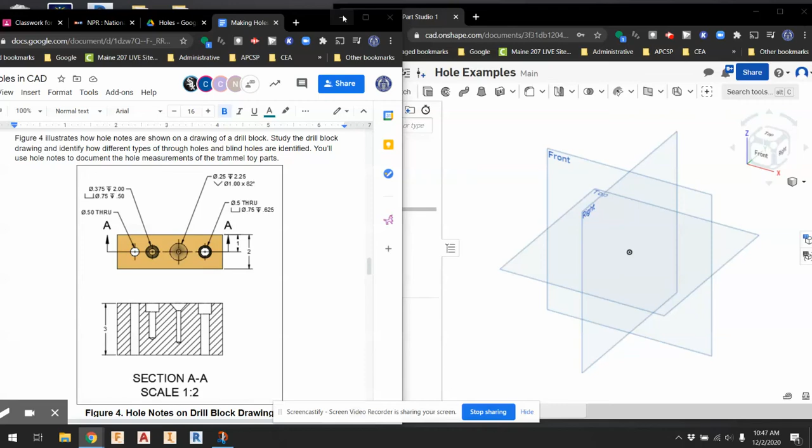All right, here is the support video to create this hole block. And here is the answer key that we're going to be recreating.

First and foremost, we're going to make the overall rectangular block. It's 3 inches tall, 7 inches wide, and 2 inches thick.

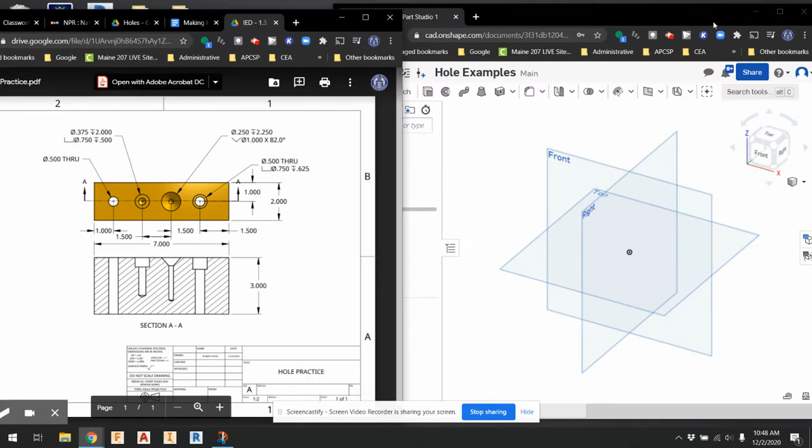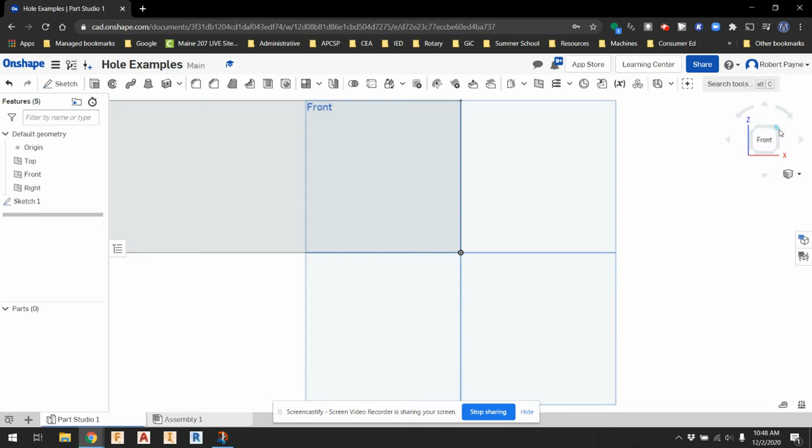All right, so I've already got an Onshape blank document started. So I'm going to do a sketch, work on the front. Use the rectangle command, so go from here to here, and remember, it's 7 inches wide and 3 inches tall. Go back to ISO view and extrude it so it is 2 inches thick.

All right, now we need to place the holes. When you place a hole or start a hole, you first need to put points at the center marks of those holes. If you look here, the holes, starting from the right edge and going over, it's 1.5 inches over each time to find the center mark of each hole.

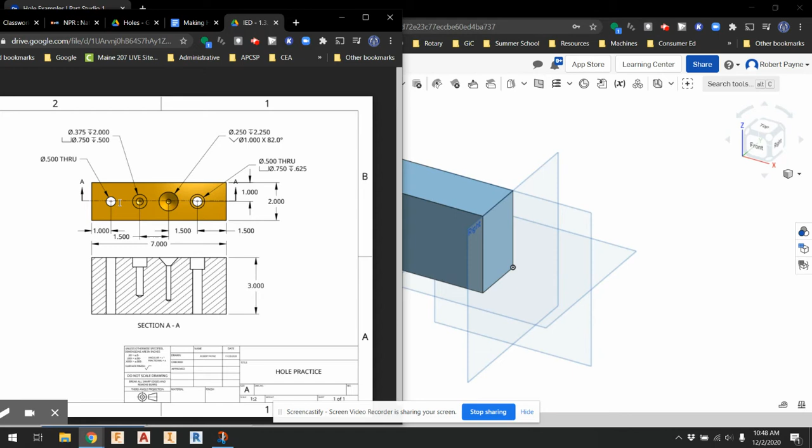All right, so I'm gonna do that on the top. I'm gonna do a sketch on the top, go to the top now. Here is the hole command, and I'm gonna just place them kind of roughly where I think they're gonna go. Nothing dimensioned yet. Now dimension them.

So again, from this edge to here should be 1.5 inches. From here to here should also be 1.5. And here to here is 1.5. And here to here is...

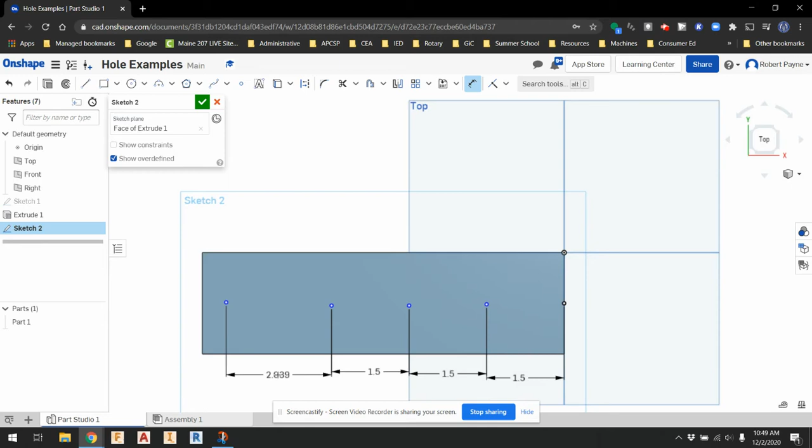1.5. The other thing is that they are in the center of the block, so they're 1 inch down from the block. So let's go ahead and do that. From here to here should be exactly 1. Repeat that a couple times.

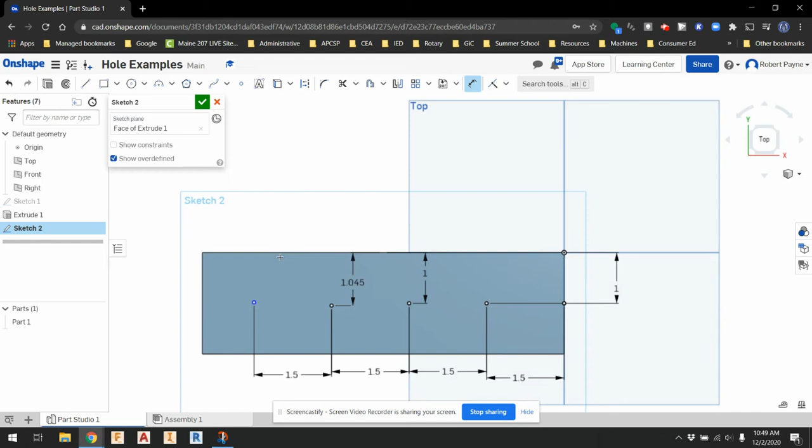All right, and last one. So the center marks are now in the correct locations. Finish the sketch. Now let's start placing some holes.

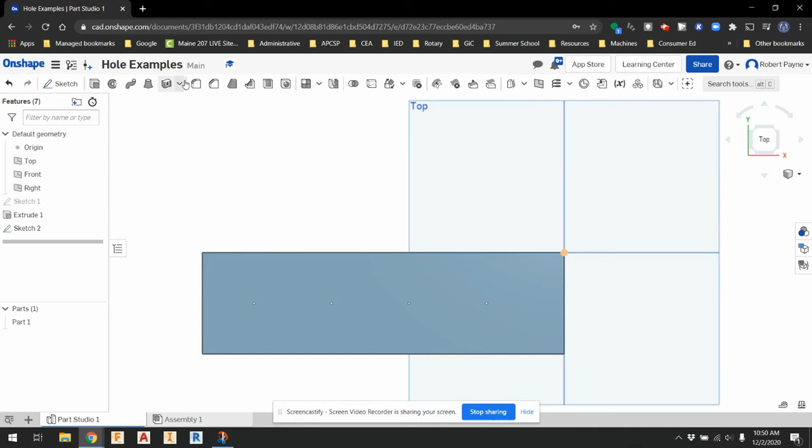So I'll do the easiest one first. This one I'll do first. And if we look here, let's see, am I able to zoom in a little? Okay, either way. All right, so this one, the diameter is 0.5 inches and is a through hole. So it's a simple half inch through hole. Okay, so use the hole function, which is right here.

Make sure it is for simple and it is a through hole. The diameter is 0.5. And just click on the center mark and that's it.

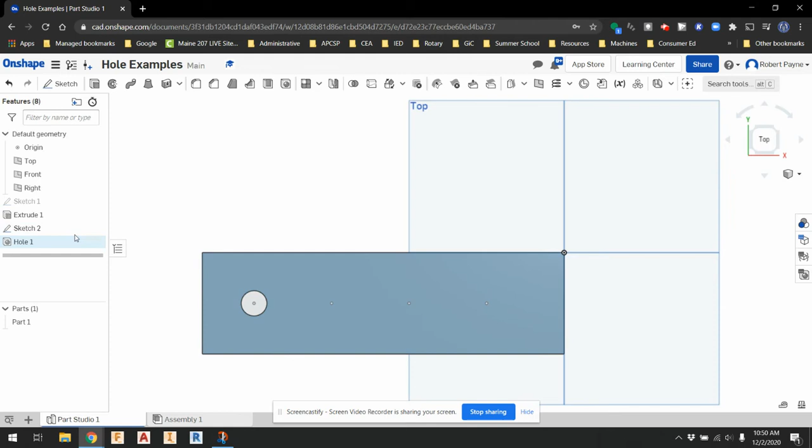All right, so you notice that the other center marks, the other points that I put in, just disappeared. So if you want to use those again, they were in Sketch 2. You can hover over Sketch 2 and see how they appear. You have to click on the visibility, the eyeball is crossed out. So now it's not crossed out. Now you can see those center marks.

Okay, next hole, this one here. The general shaft diameter is 0.375, depth 2 inches, but it's a counter bore. That's that symbol here, counter bore, and that counter bore is 0.75 inches with a depth of 0.5. Okay, so let's recreate that.

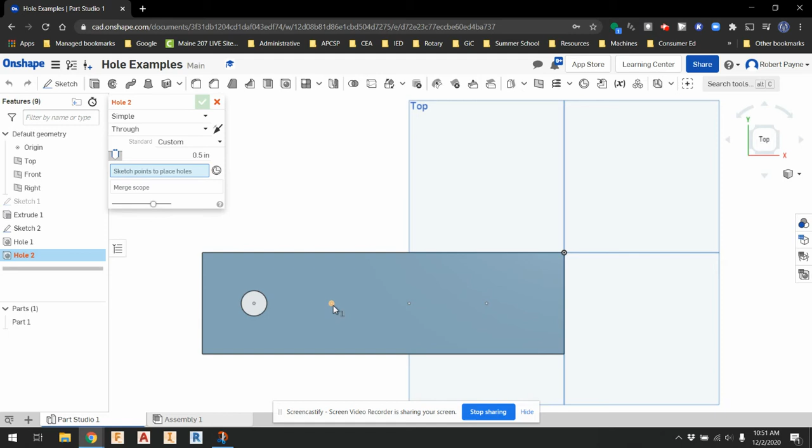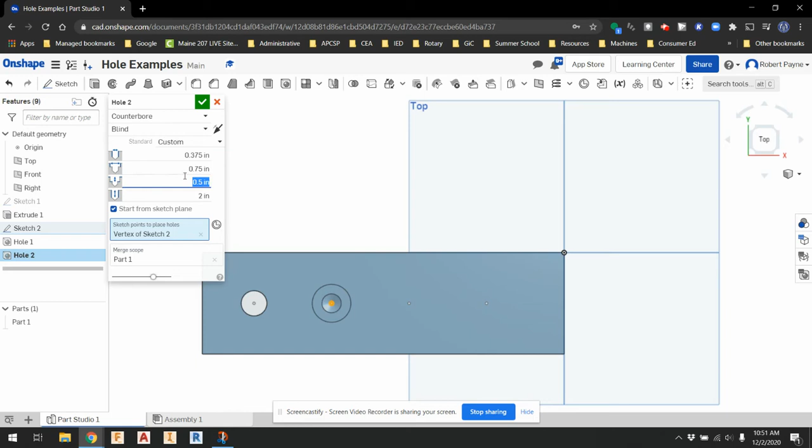So again, click on the hole feature. It is a counter bore, that's what that symbol meant. It is not a through hole, it's blind. Remember the general hole is 0.375, the depth of the general hole is 2 inches, that's the top and the bottom one. Now the counter bore itself, 0.75 for the depth of 0.5. I already had that typed in, but I'll just update those and say okay.

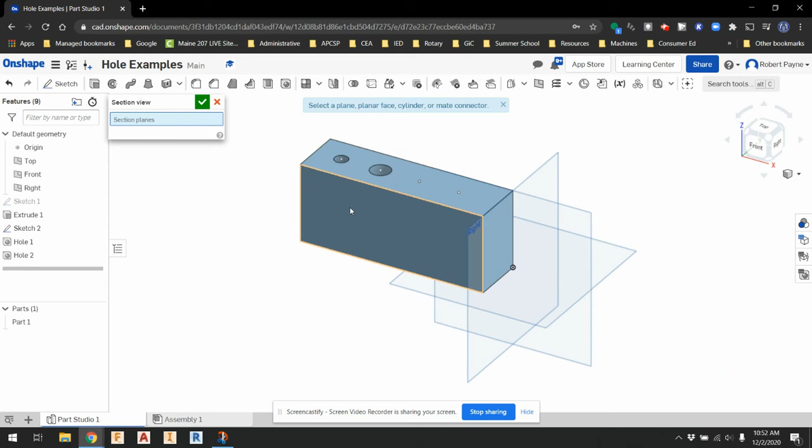All right, so now you might be wondering, well, did that work? Because it looks a little kind of suspect. It's hard to tell. One way to check is if you go back to ISO view here, this object right here, the camera render option, if you hit the down arrow, you can do section view. And I want to pull this section back to see kind of inside of it.

And then I can start looking back into the object and it looks about right. So it's a simple through hole, there's my counter bore and depth. I don't have the dimensions yet, but at least it kind of looks right. All right, so I can leave it like that. And I'm just going to turn section off now, go back to top. All right.

And now let's do the third hole. The general hole diameter, so the shaft of the hole is 0.25 inches at a depth of 2.25, but it's a countersink hole with a diameter of 1 inch and angle of 82 degrees.

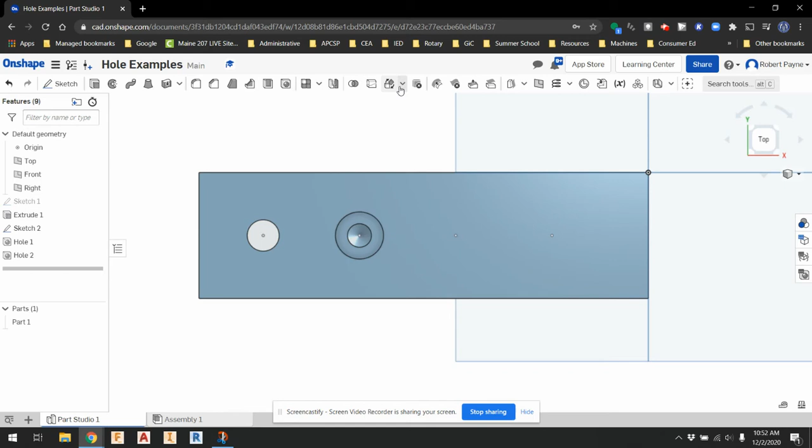Heading back here, use the hole feature, change it to a countersink. All right, let's recall, I think it's 0.25 if I remember correctly. The depth was 2.25, let's just verify that. 0.25 and 2.25, yep. And then 1 inch diameter, 82 degrees.

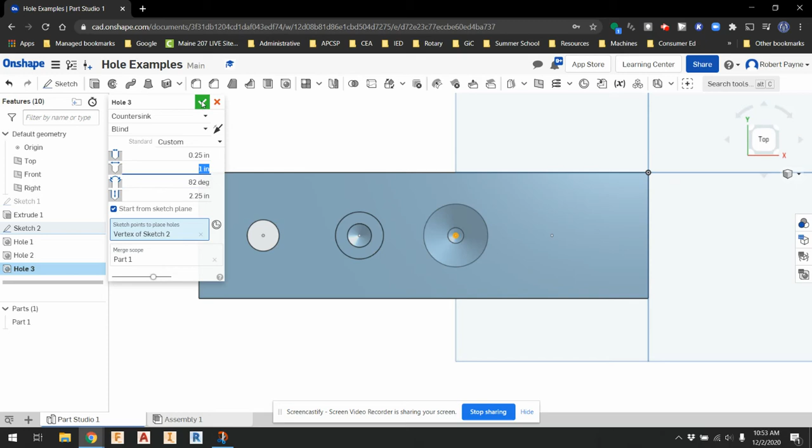So 1 inch diameter and 82 degrees is kind of the standard. All right, click. And then the last one, the very last hole is a counter bore, 1/2 inch through hole. So the general shaft is 1/2 inch through, the counter bore is 0.75 at a depth of 0.625.

Okay, so go back to the hole feature. Let's switch it over to a counter bore, a through hole here. My memory is terrible at the moment. 0.5 inch for the general shaft, 0.75 for the counter bore at a depth of 0.625. So 0.5, 0.75, and 0.625.

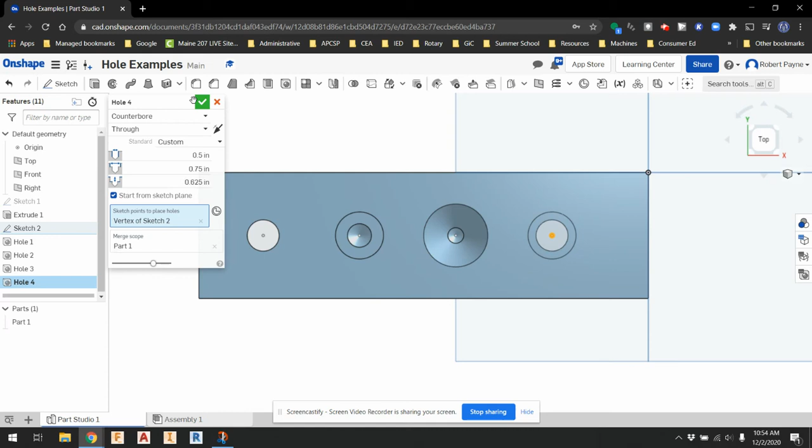All right, and let's go back to ISO. Let's check out the section view. Looks about right. And then I'm going to turn that off. Okay, so now I'm done creating the part.

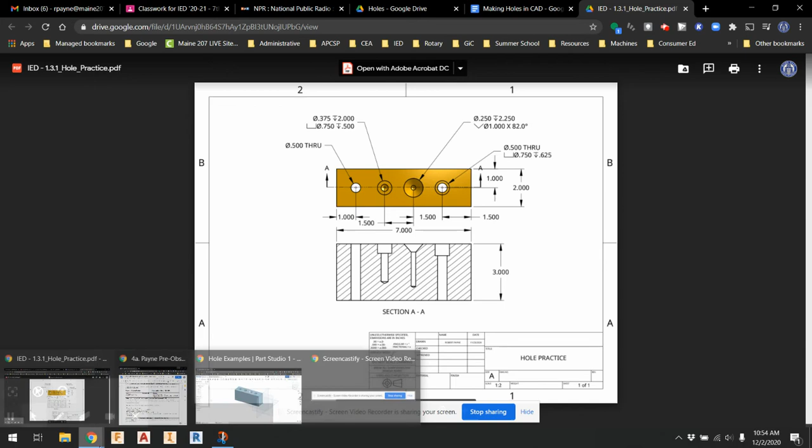Now let's go ahead, just in case you want it to really look the exact same, this yellowish, I did change the color, or you can change the color. So right click, say edit appearance, and change it to like a goldish color. That's totally up to you if you want to do that or not.

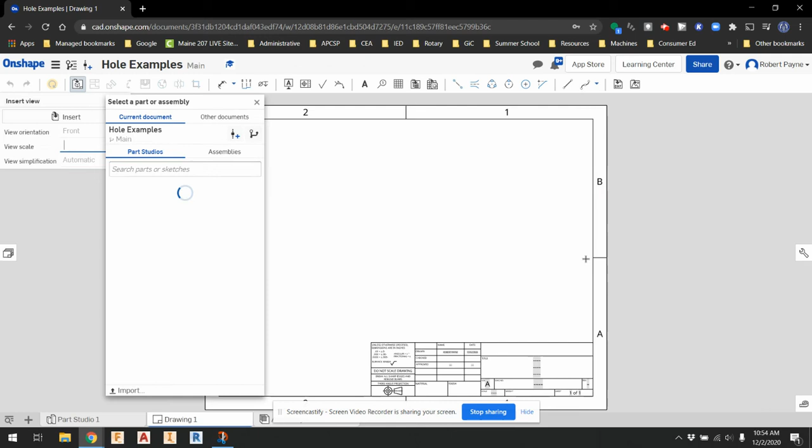All right, now for the drawing. So add drawing. All right, so add the part. And remember, so right now I'm on the front face. I don't want to be on the front face the way I drew it. I want to see the top face. That's where the holes are.

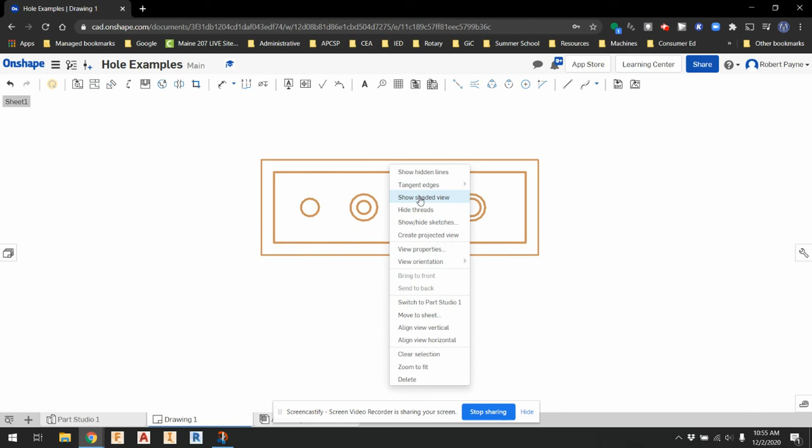Okay, so I'll place that. So click, that'll place it. Hit escape. All right, so there's that. I want this to show up in shaded view. And now I want to cut a section across the center of these holes.

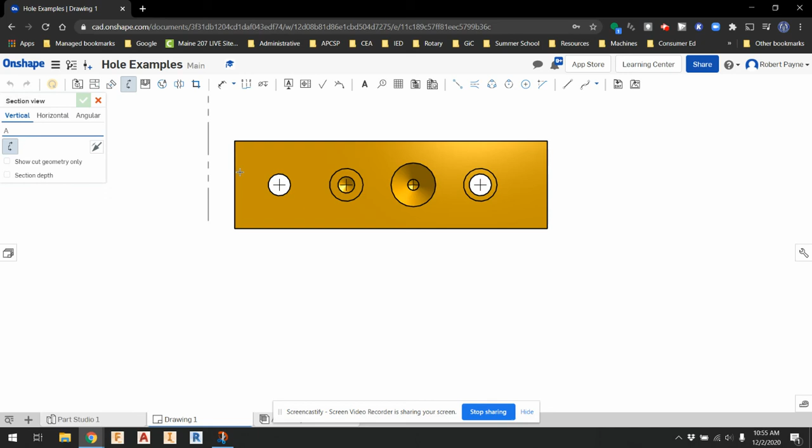Okay, so first off, let's go ahead and put some center marks in. So this right here is the center mark option. There we go. And now this option here is a section, so we'll cut a section. It defaults to vertical, I don't want to cut a vertical section through, I want to cut a horizontal section through. And I'm going to choose the center mark of the holes. All right, and then drag down. And there is the section view.

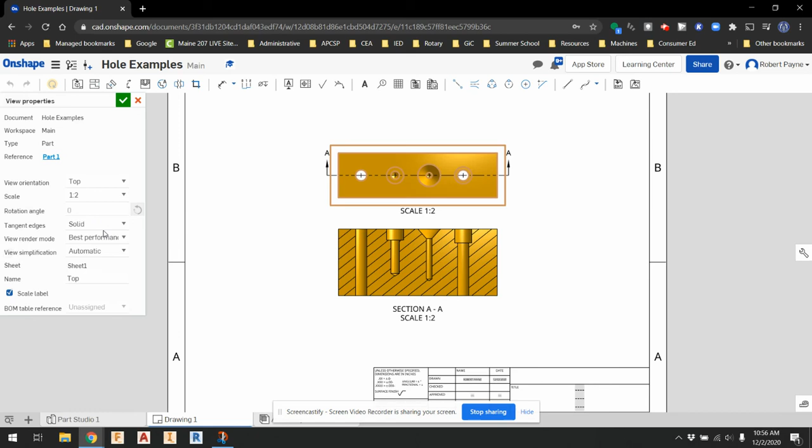All right, this, I could have done better. I could have done a scale of 1 to 2, I think. Yeah, that fits. I don't think I can fit a 1 to 1. I think if I double it, it's going to be too big. Yeah, it's too big. All right, so let's stick to 1 to 2. That looks better.

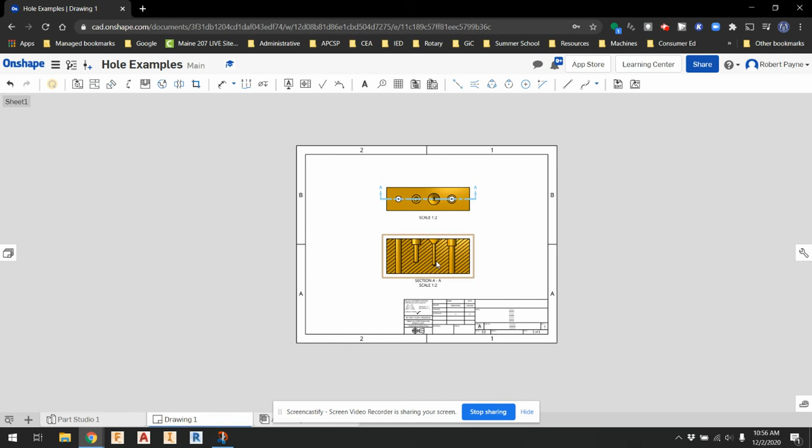All right, let's say OK. Drag this down a little bit. This one, I'm going to switch to turn off the shaded view. OK, now let's do some dimensioning. So dimension is, there it is.

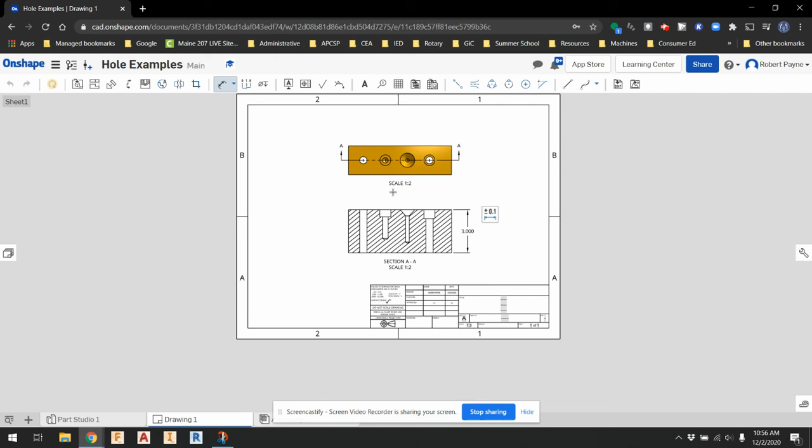So the height, I'll dimension. The overall width, where am I going to put that? Let's say from here to here. The dimension from here to here, I'll put that dimension out here. And again, from here to here. And finally from here to here. And then from here to here.

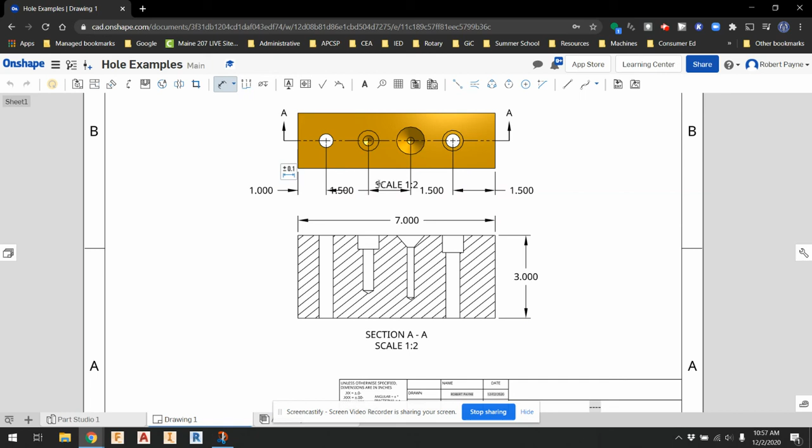Okay, this one I'm going to need to, so I should have dragged this one down a little bit. Okay, otherwise I can't see it. Oh, and this scale, I'm going to drag the scale up. Okay.

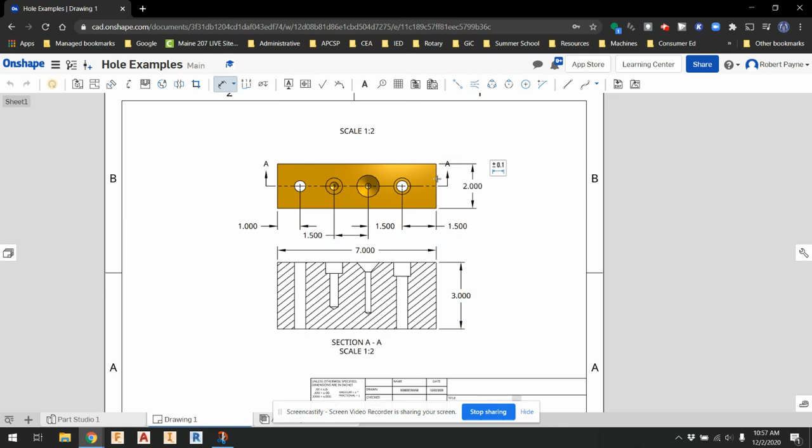The thickness I didn't dimension yet, so it has to be thickness here, and then the thickness from the depth, or yeah, oops, let's try that again. Yeah, there we go. Okay.

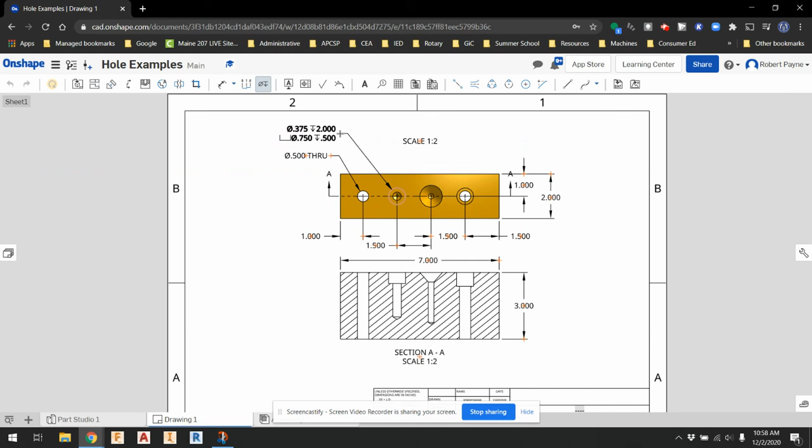A little further, okay. All right, so now the hole callouts. So really simple, here's the hole callout feature, and Onshape pretty much does it for you. So just click on the hole, and it gives you all the information, the relevant information. You just need to put it at an angle for the leader, and just put them in the appropriate place so you can actually see all the information. So kind of nice that it does most of the work, pretty much all the work for you.